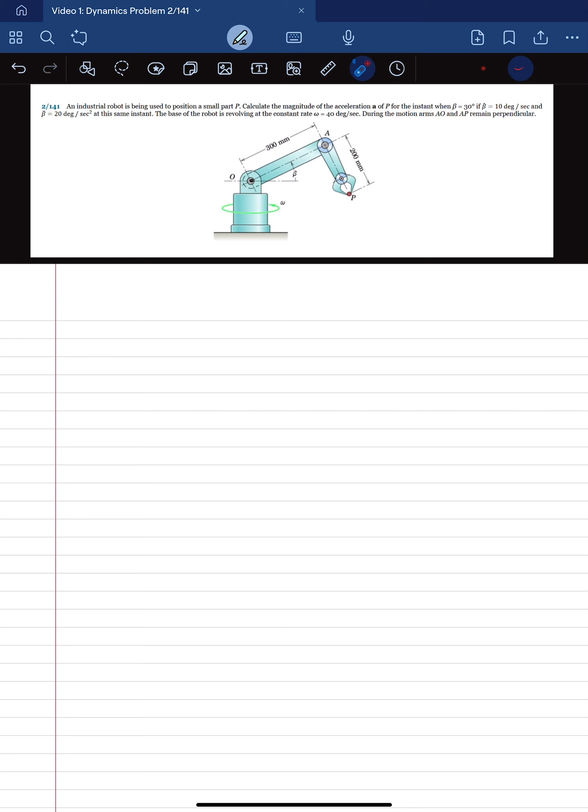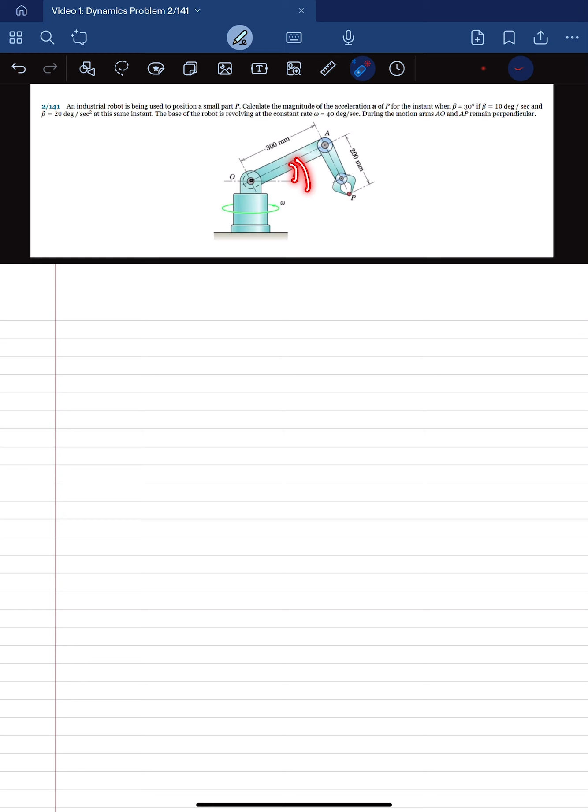All right, so let's solve this thing. So what do we have? We have this angle right here. The first mistake that I feel like people would fall into is using this angle, because this is the angle between this arm and the horizontal. But the distance r, if you're using spherical, is actually at a different angle from the horizontal. It's at like this angle right here. So you want to figure out what the angle between this side of the triangle and that side of the triangle is, and do beta minus that angle. So I'm going to show you what I mean.

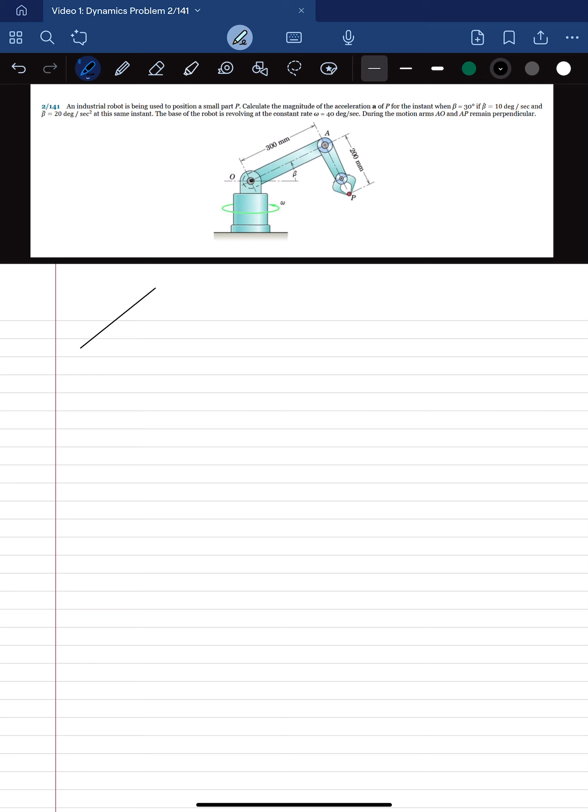So I'm going to draw this arm as some sort of triangle. I'm going to draw it like this, and then like that, right? So we have this sort of triangle — I don't know, it doesn't actually look that much like a triangle, I'm trying to use this iPad to draw well, but whatever. We have 200 millimeters here, we have 300 millimeters here. So what's the length of this third side?

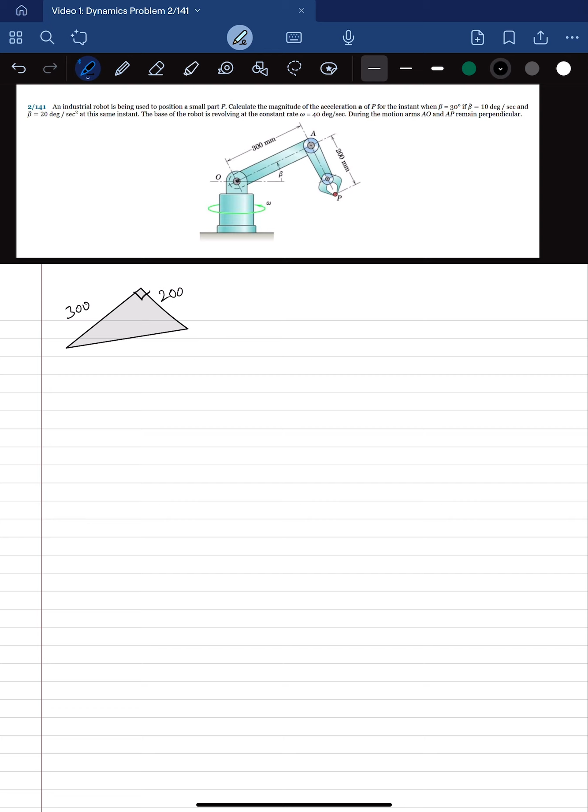Well, you would use Pythagoras' theorem, and you would say the length of this third side is the square root of 300 squared plus 200 squared. Let me put that in my calculator. That is 360.555, so I'm going to round that to 360.56 millimeters. So that's the third side.

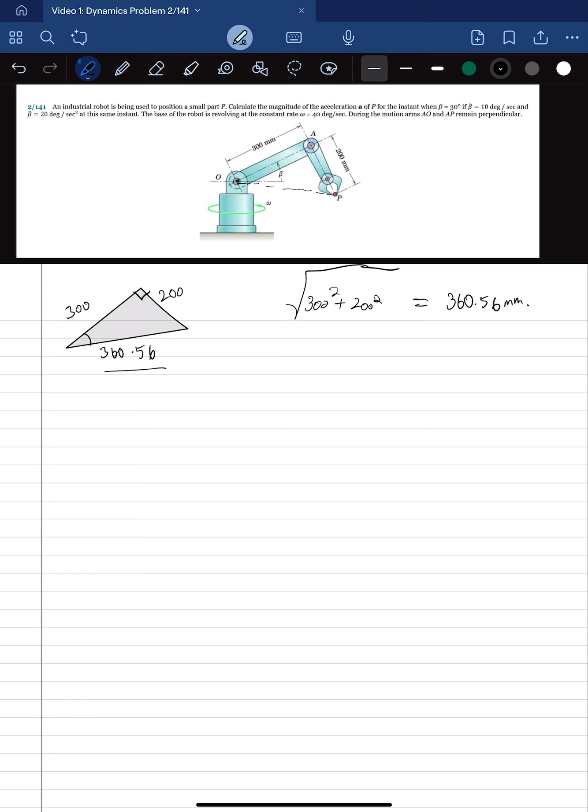And I know you don't need the length of this side to calculate this angle, you can just use the tangent. But I'm going to calculate it anyway because we're in spherical and I want to know this distance right here, this distance r, because it's probably going to be used in my spherical calculations. So now I want to know what the angle between r and the horizontal is, and I'm going to name that angle phi.

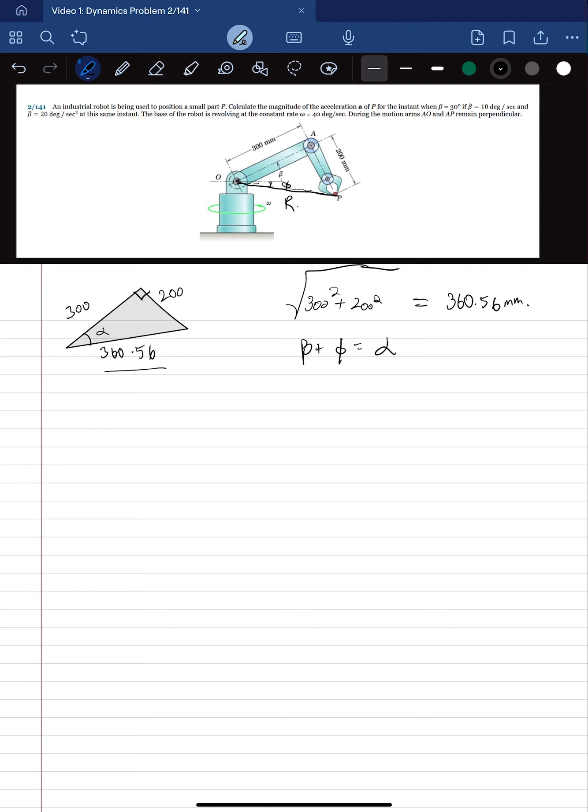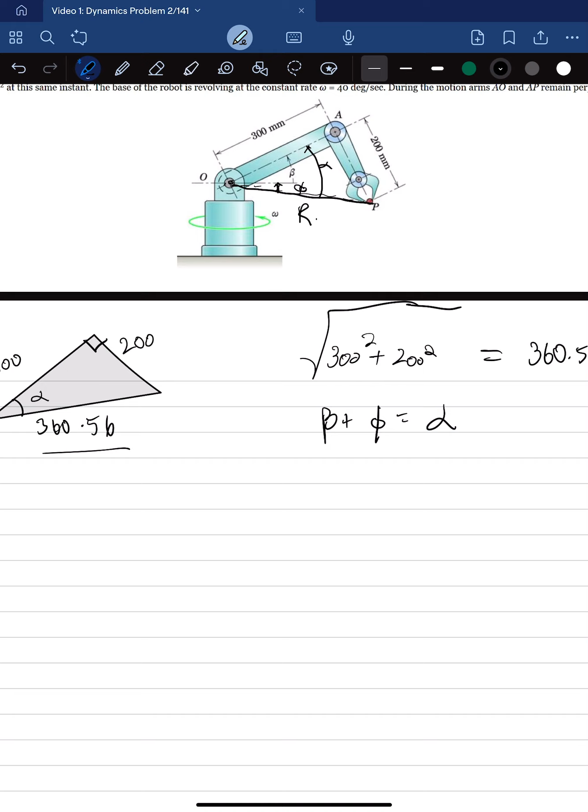So this is the angle phi, and this is the angle beta, and this angle right here I'm going to call alpha. The relation between alpha, beta, and phi is that beta plus phi equals alpha. You can sort of see that from my drawing, because alpha is this big angle right here, and this is phi right here. Oh my god, that is a terrible drawing. Anyways, this is alpha, so we have this relation. Now, looking at this triangle, knowing that this is a right angle, we have that the inverse tangent of 200 over 300 equals alpha.

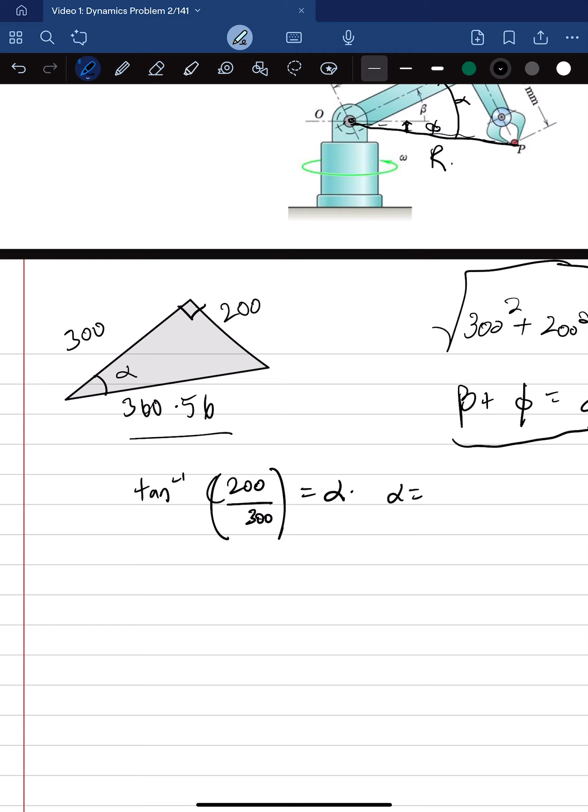So what is alpha? We're going to do this in radians, and I'll explain why. That was actually the main problem I had when solving this — I was solving it in degrees because my calculator was in degrees, and I kept getting it wrong. It turns out the circumference of a circle is 2 pi r, not 180 r, so you've got to be in radians.

So we have alpha is tangent inverse of 2 by 3. I'm going to do that, and that gives us alpha is 0.588 radians.

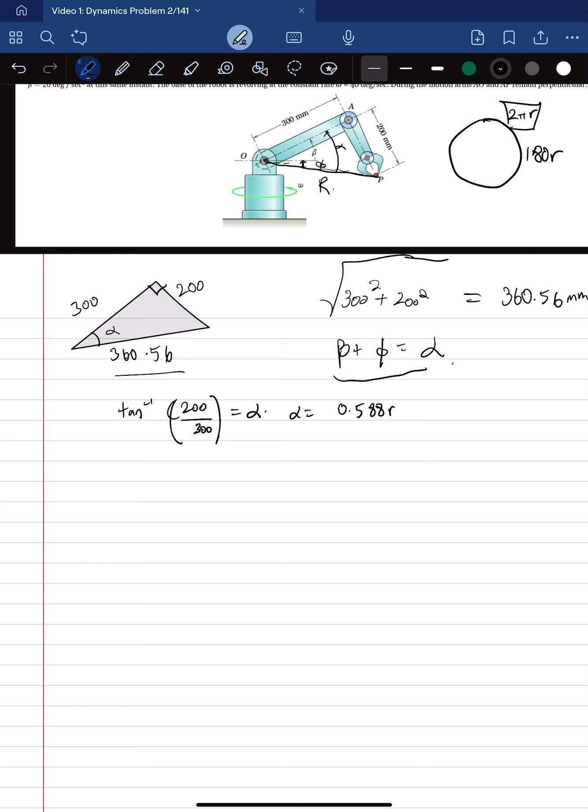So that's alpha. Now beta is 30 degrees, so beta is 30 times pi over 180. This cancels and gives us pi over 6. I'll simplify that: it's about 0.524 radians.

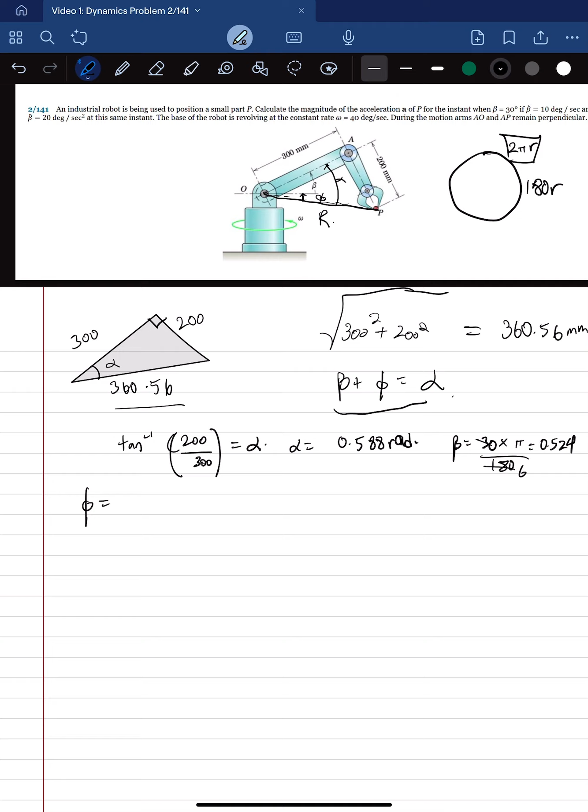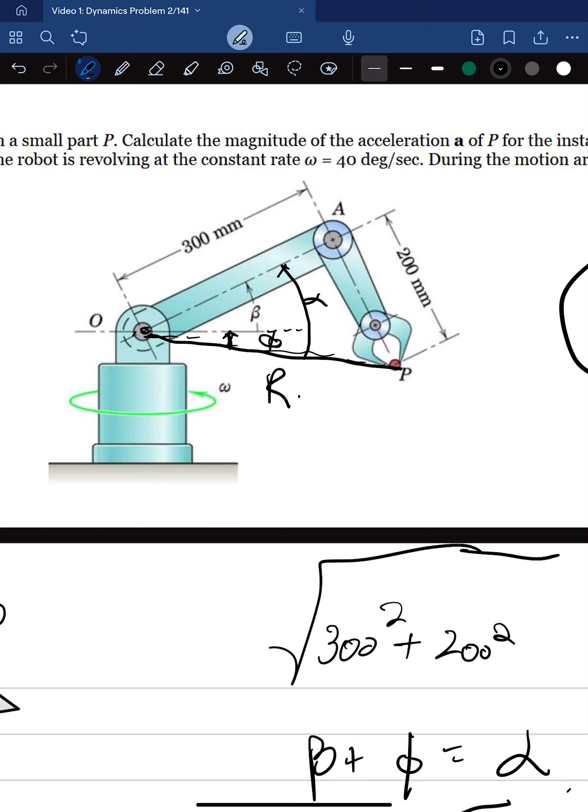So phi is... I'm actually going to define this angle from the horizontal. I'm going to go up beta and then down alpha so that I get the downward angle from the horizontal. Let me fix my equation here to say that phi equals beta minus alpha.

So what is beta minus alpha? 0.524 minus 0.588 — let me put that in my calculator and figure out what that is. What I get is negative 0.064. So I'm going to save that. Now we have a value for phi.

Now, if phi is beta minus alpha, and I take a derivative of this with respect to time, this angle is sort of like a constant, so it's just going to die, right? Because that angle between this side and this side stays constant. But the angle beta does not stay constant, and neither does the angle phi.

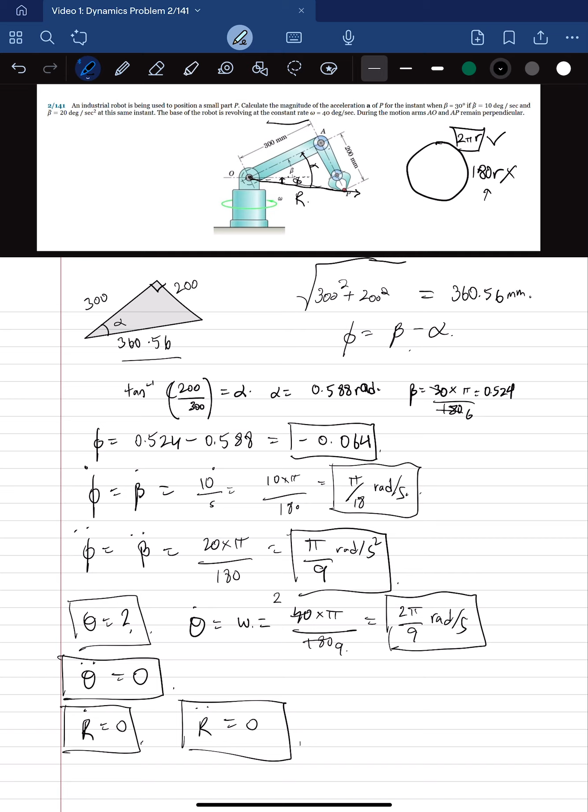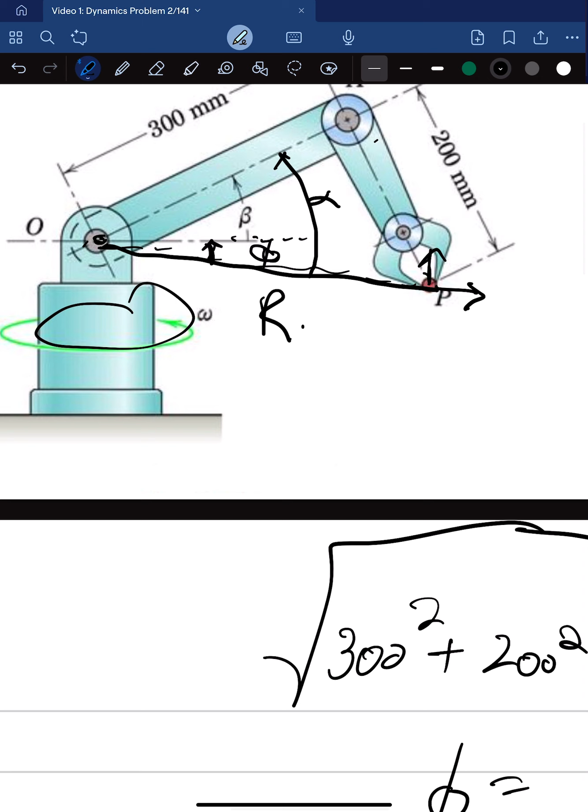So we have an r direction - the r direction would be outwards this way. We have a phi direction, which would be upwards this way. Let's zoom in here. And then the acceleration in the theta direction, since theta is sort of spinning around that way, is going to be into the page, so it's going to be like that.

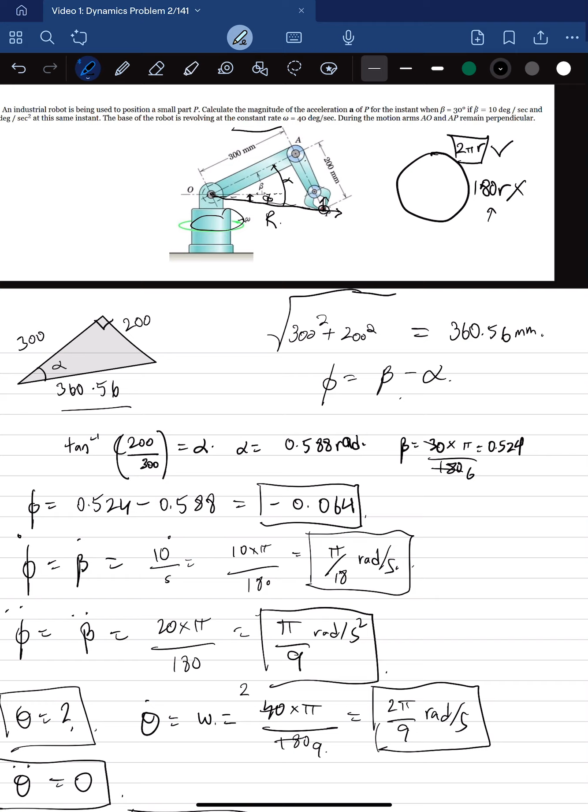And frankly, whether it's into the page or out of the page does not matter, because there's no acceleration of the angle in that direction, and also because we're taking the magnitude. Ignore what I first said - it doesn't matter because we're taking the magnitude. That's the reason why it doesn't matter.

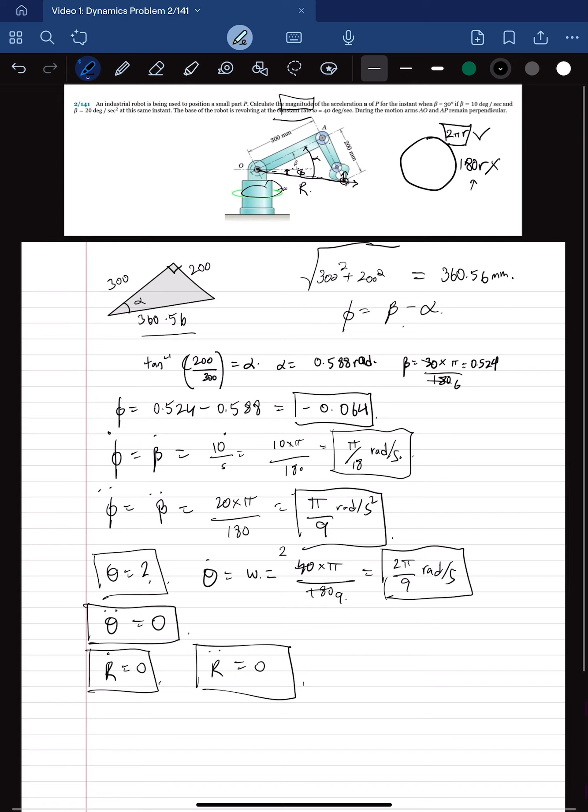Anyways, so we need to find the three components of the acceleration. Now, I'm going to start with this formula actually. Acceleration is acceleration sub r in the r hat direction, acceleration sub theta in the theta hat direction, plus acceleration sub phi in the phi hat direction. So this is our acceleration.

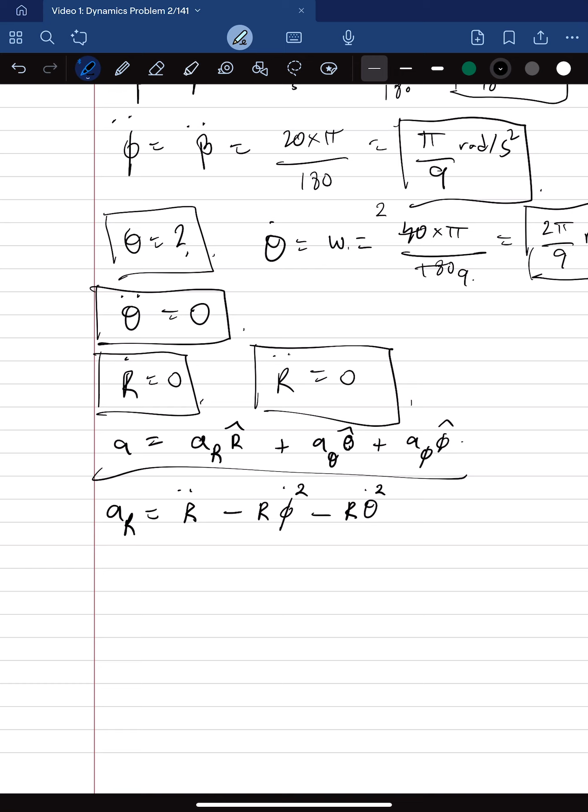So first we need to find the acceleration in the r hat direction. And that is the second derivative of r, minus r times the first derivative of phi squared, minus r times the first derivative of theta squared, times the cosine squared of phi. And the reason why you have this cosine squared phi - so this makes sense, right? Because this is just acceleration.

So this is just acceleration. It's the second derivative of displacement, right? This is the equivalent of omega squared r - it's like how you get how it exists in uniform circular motion.

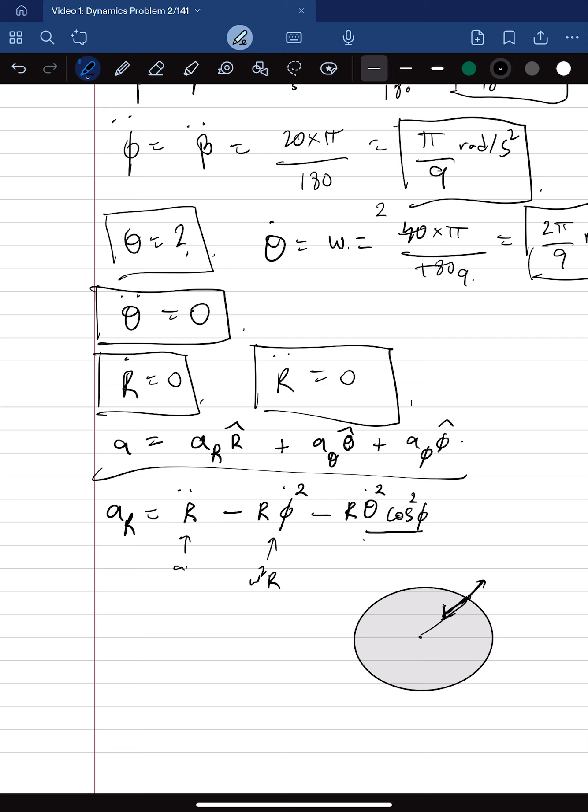And the reason why it's negative is because this right here is like, if you have a circle, it'll be the acceleration outwards. If you have a circle and this is the radius and you're over here, your r double dot will be positive in this direction, while your r phi dot squared will always point this way, and that's why you subtract it, because these two accelerations sort of cancel each other. Same thing with this guy right here, but you're adding that third dimension of phi.

And so this thing could be - if I flatten this circle, imagine this line is the circle, and we're looking at this thing from this angle now, and this is where this is phi. This would be like x, and this would be y. And right now this is x, and this is z. So right now, if it's spinning into the page, if it's all the way up, if this is where the point is and it's spinning around like this, there's actually no acceleration because it's literally staying in the same point. You know what I mean?

So the cosine of this angle phi matters because you start spinning as soon as you tilt down from that axis right there. And now if you're spinning around this thing, now this point actually is spinning. Anyways, that's a side note. I'm going to try and get through this video without deriving all of this stuff because that should be something I do in another video. Anyways, so this is your formula.

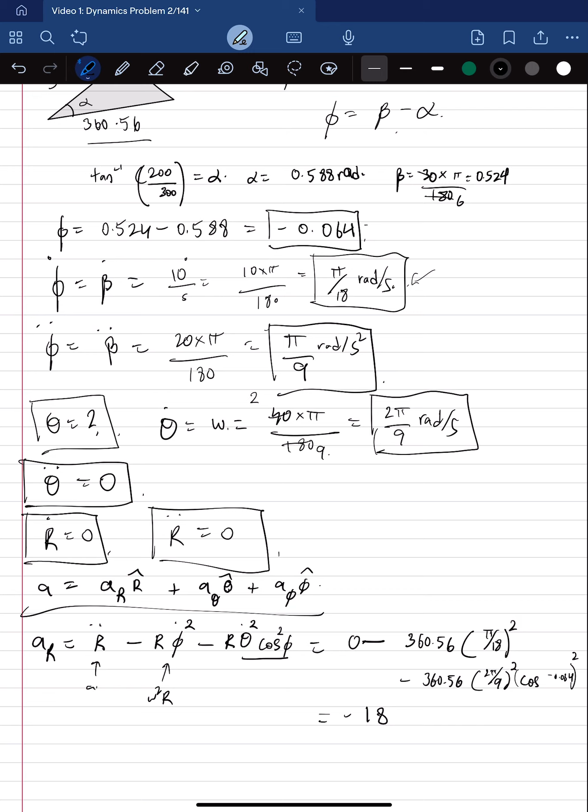Okay, so I'm getting negative 185.9 millimeters per second squared. So that would be our acceleration in the r direction.

Now, I don't know, I might have made a calculation mistake, but we'll find out eventually because I do have the answers here somewhere.

Okay, so next comes the acceleration in the theta direction. So, and that is equal to cosine phi over r times the derivative of r squared theta dot minus 2r theta dot phi dot sine phi.

Now, I'm going to take this derivative. So the derivative of r squared theta dot is, I'm going to first start with the r squared because it's product rule. So we're going to go d by dt r squared theta dot equals 2r r dot theta dot plus r squared theta double dot.

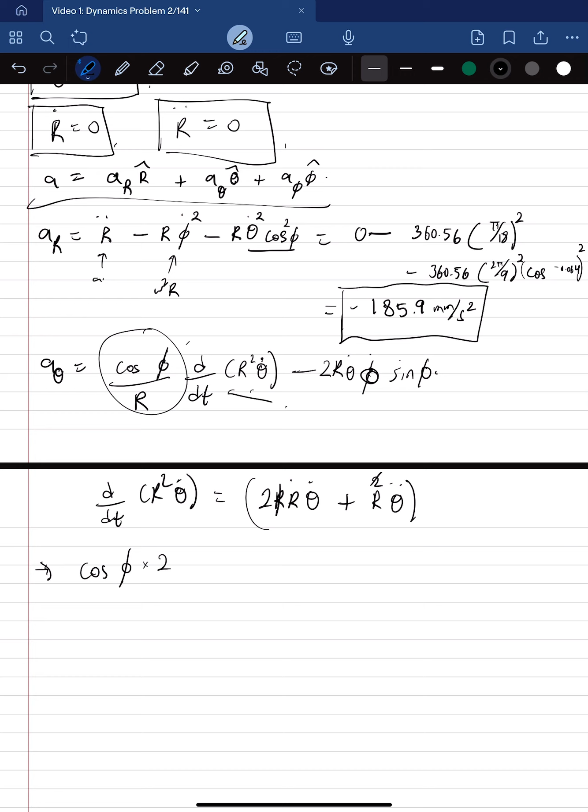Okay, so that whole thing, and that is multiplied by cosine phi over r right here. And so that means that I can cancel some r, so this dies and this dies. And now we have cosine phi times 2r dot theta dot plus cosine phi times theta times r times theta double dot. Okay. So that whole thing is then added to minus 2r theta dot phi dot sine phi.

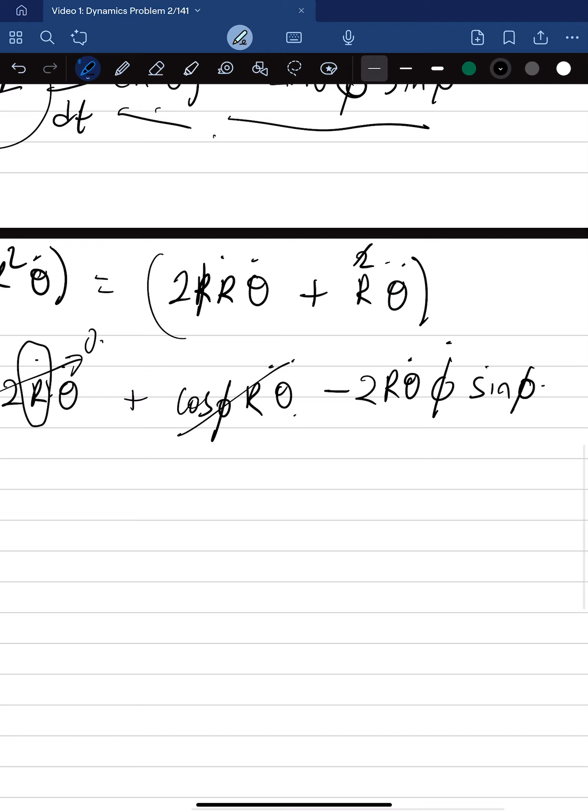So what does that mean? If we look at r dot, we know that this thing isn't changing in radius, so r dot is 0. So this whole term goes to 0. Now we know there's no angular acceleration in the theta direction, because this speed stays constant. So this goes to 0. So we're left with this term. Now what is that term? We have negative 2r theta dot phi dot sine phi.

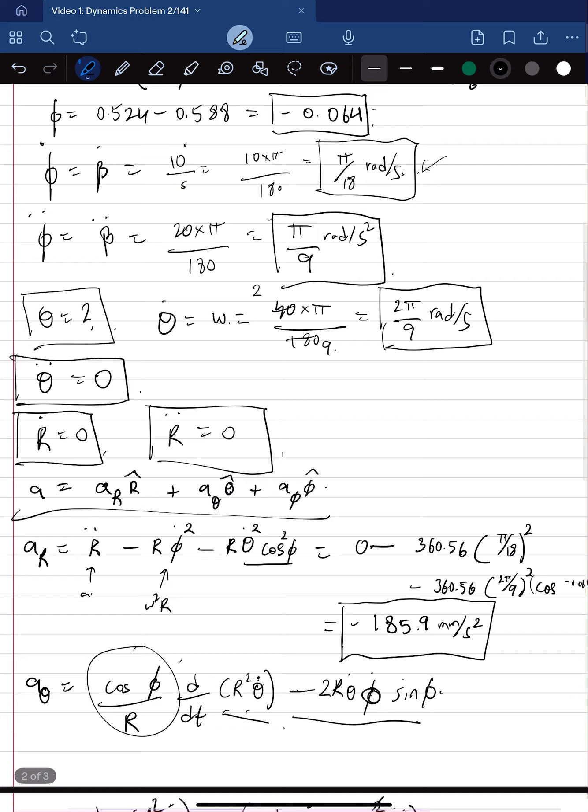So our r is 360.56. So that's times theta dot, which is 2 pi over 9, times phi dot, which is pi over 18, sine phi, and phi is negative 0.064. Okay, so now that will be equal to times 360.56. So the answer I'm getting is 5.62 millimeters per second squared.

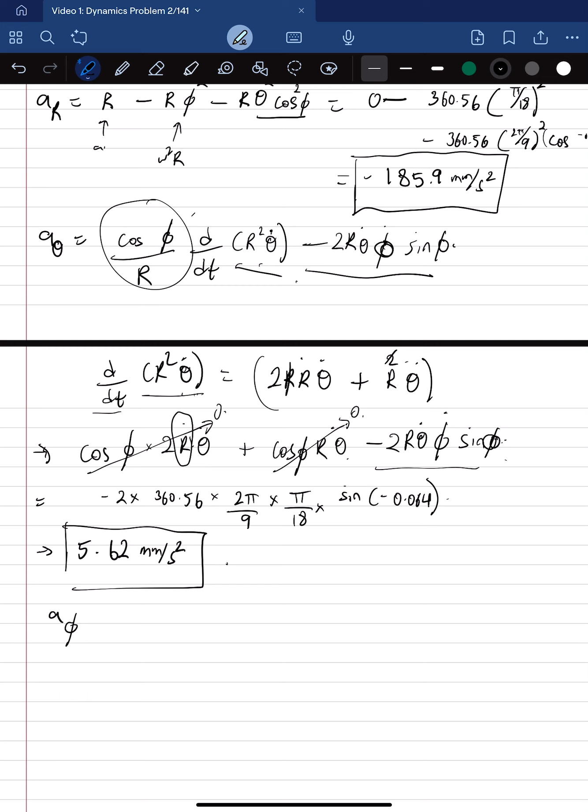Okay. Now, for the last term, which is the acceleration in the phi direction. Oh yeah, another common mistake I've seen is a lot of my friends didn't expand this. So yeah, you should definitely expand your things, because some unexpected stuff always shows up with the product rule.

Anyways, the acceleration in the phi direction is equal to 1 over r times the derivative of r squared phi dot plus r theta dot squared sine phi cosine phi. So let's expand this derivative. So we have 2r r dot phi dot plus r squared phi double dot, right? And this whole thing is over r, so that becomes 2r dot phi dot plus r phi double dot plus r theta dot squared sine phi cosine phi.

And now we know that r dot is 0, so this goes to 0. This does not go to 0 because r phi double dot, neither of those are 0, and this does not go to 0 either. So let's plug in. So we have 360.56 is R, so we have 360.56. I'm actually going to take that out because it's common to both of these terms. And phi double dot, what is that?

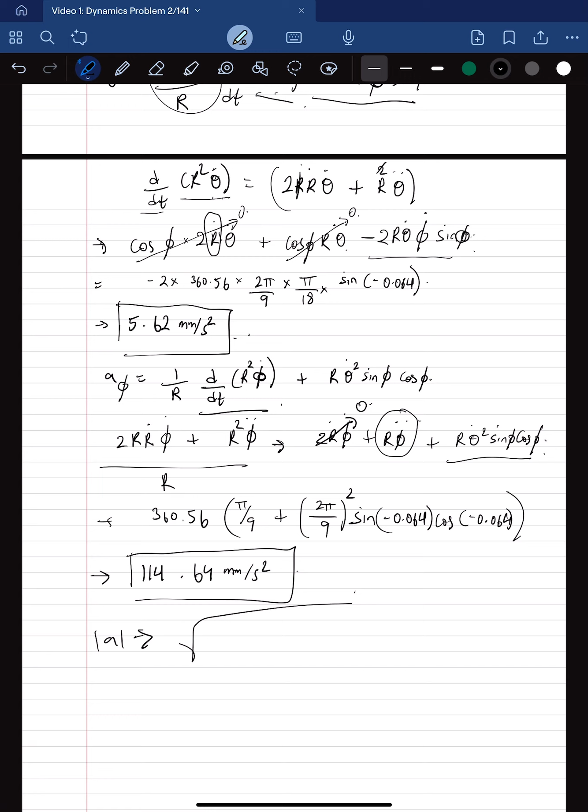And so for the magnitude of the acceleration at that point, I'm going to square all of these terms, this one, and this one. And I'm going to add them up and then root it. So it's going to be 114.64 squared plus 5.62 squared plus 185.9 squared. And this negative sign doesn't matter because I'm squaring it.

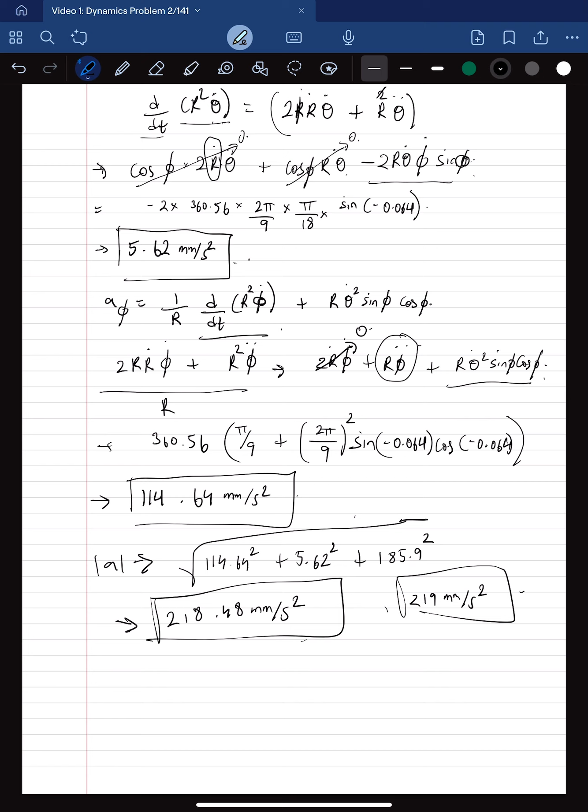And the acceleration should be, so my answer right now is 218.48 millimeters per second squared. I'm gonna check with what the book has. Yep, they have 219 millimeters per second squared. So yeah, I mean, they just rounded, I guess, in some places where I didn't. So this is the correct answer. Yay.